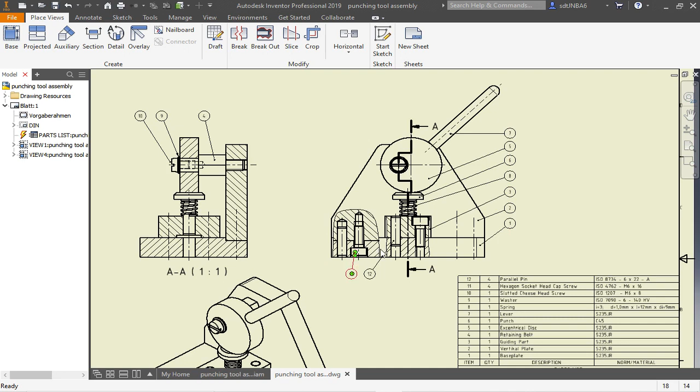Today we are going to make the drawing. So this time I want to show you how to make section views which look this way, and we're also going to talk about the breakout. So let's get started with our assembly and start

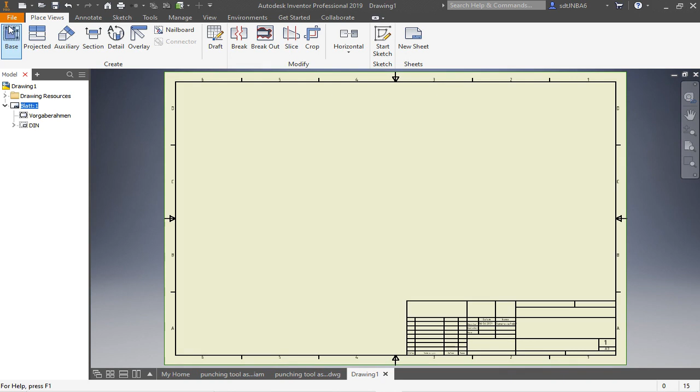DWG file. As always, we have to set with a right click the right size, A3 landscape mode, and then enter the base view. As the assembly is the only thing that's open in the background, the assembly comes automatically. Otherwise, select your assembly here on this open and existing file.

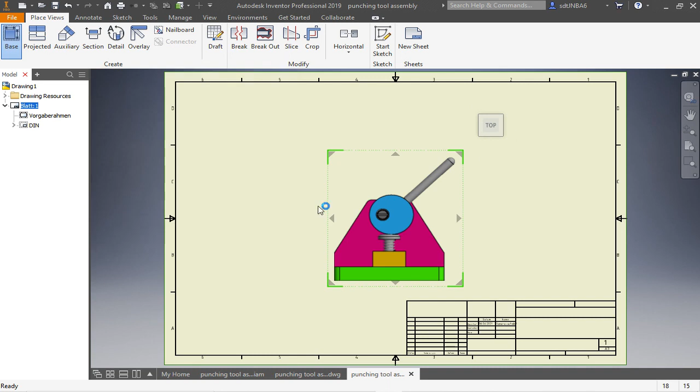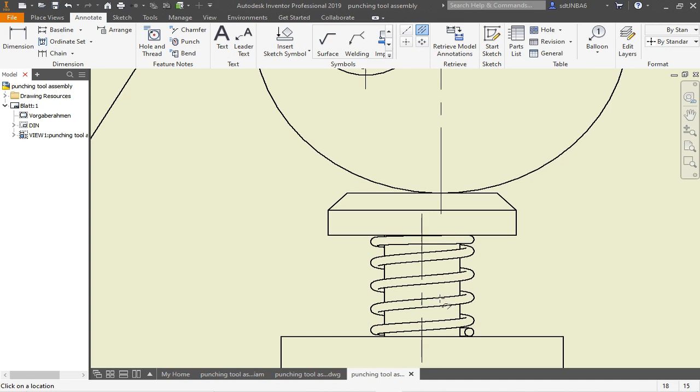So I'm going to start with a right view. This is what I need, scale 1:1. And we place it here. So let's enter at first some annotations like the center mark here and here, and a center line in our bolt. So now you can see that the eccentrical disc is not centered to the punch.

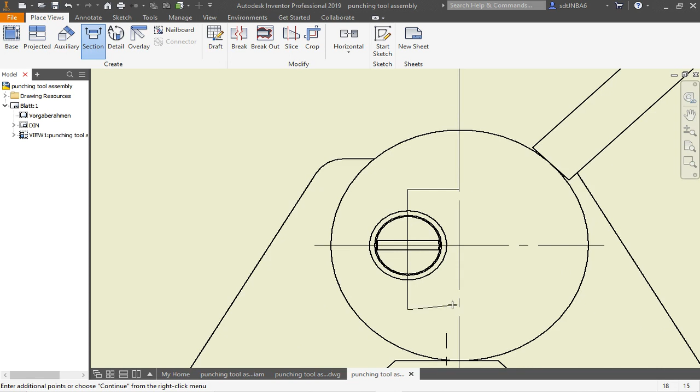Let's go on place view, go on section. Now make sure you get the middle of the disc, like so. Click once, go downwards, click a second time over the screw. Now go to the left. Now we have to find the center of the screw and the washer. Go here to the washer and the screw, pull upwards. Here, go back to the center of the disc, because here we have the contact to the punch.

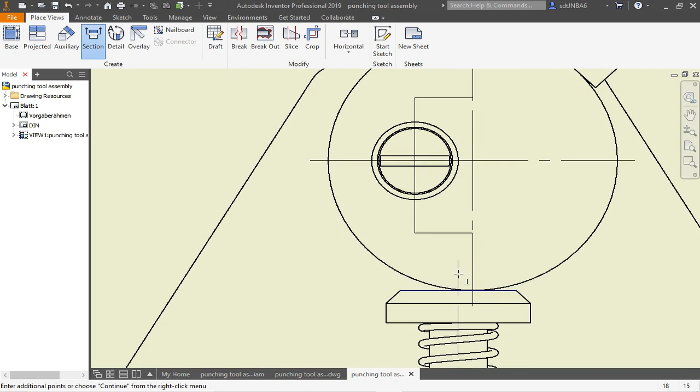Now go to the punch, place it here in the middle, go to the middle of the punch, like here, and now straight downwards. So left click, right click, continue, and bring the view to the left side.

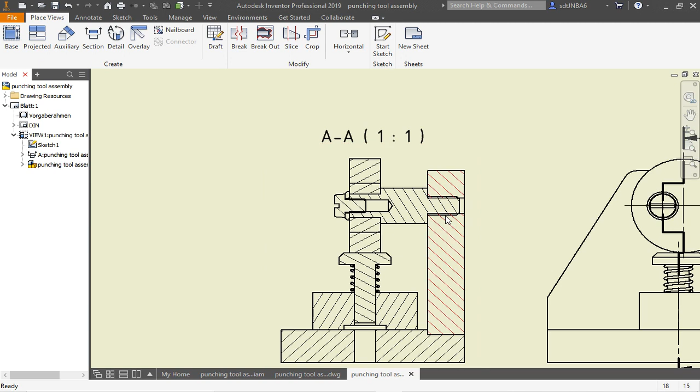So every time we have those steps here, we get solid lines, which is not correct. And so we switch off the visibility of those fat lines. We don't need them. Those ones as well. Next thing is we're going to correct the angle of the lines here. Switch it to 45 degrees and 135.

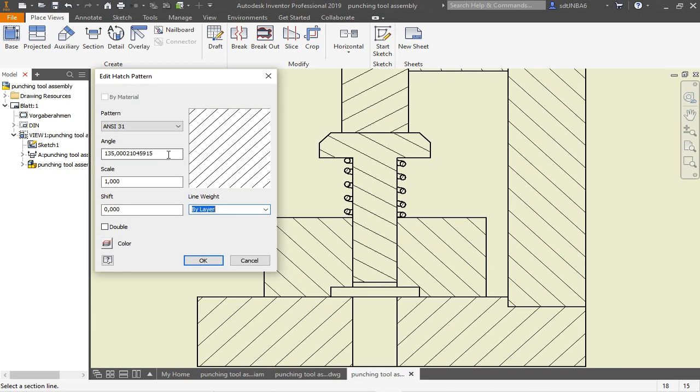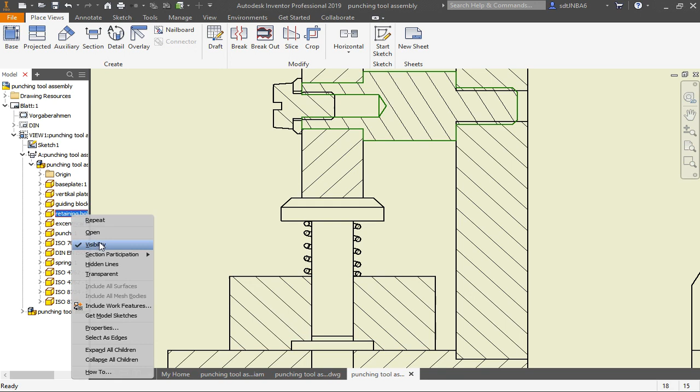And now we have to remove those parts out of the section view which are not to be displayed cut. So go here in the section view, open the punch, go right click on the punch, section participation, none. Same for the retaining bolt. Here right click, section participation, none. Same for the washer and the screw. And we also can bring the spring out of the section.

Now we can enter symmetrical lines. And we have to show the thread as well. So double click on the frame of your view, go to display option, thread feature, you have to check the box and say OK. Now you can see the thread.

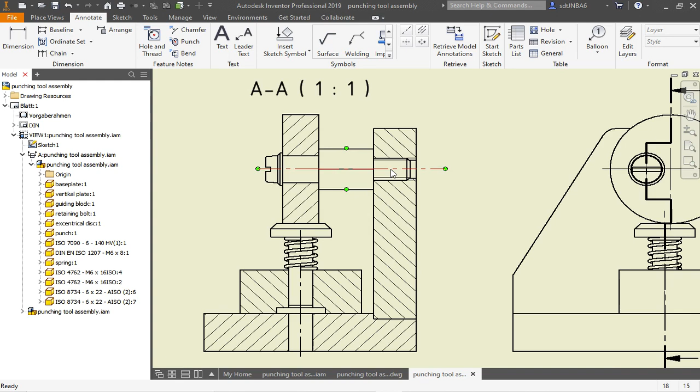So this time we want to see the hidden lines of this part. As we don't want to see them globally in all of this view, go to your retaining bolt, right click and say hidden lines. Do you want to continue? Yes, and now we only see them here in this part. And we can do the same for the screw.

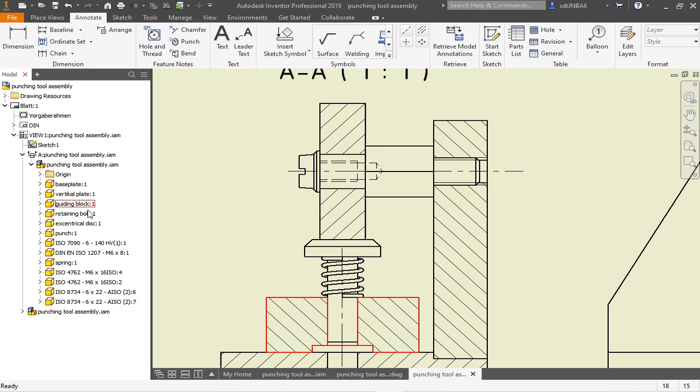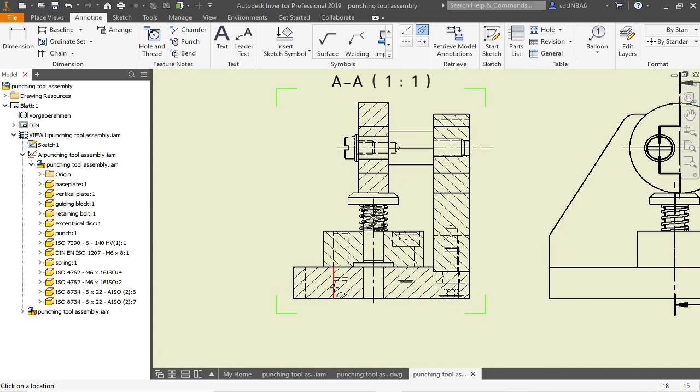So we can also enter symmetry lines to those holes here. And therefore, click on the frame, go to raster view, switch it on. Now go on the center line. You can enter them here, here, and here. Extend them a little, like so. And later on, switch off the raster lines again.

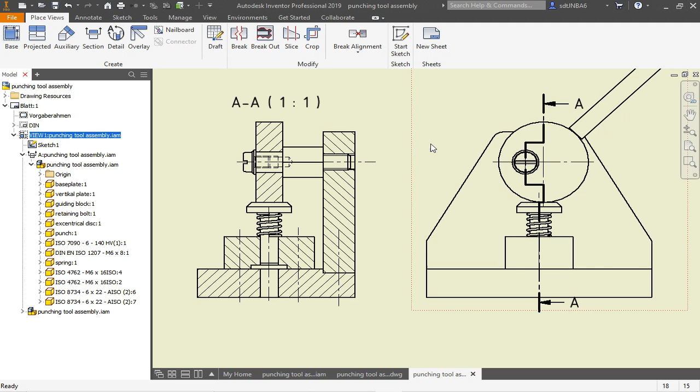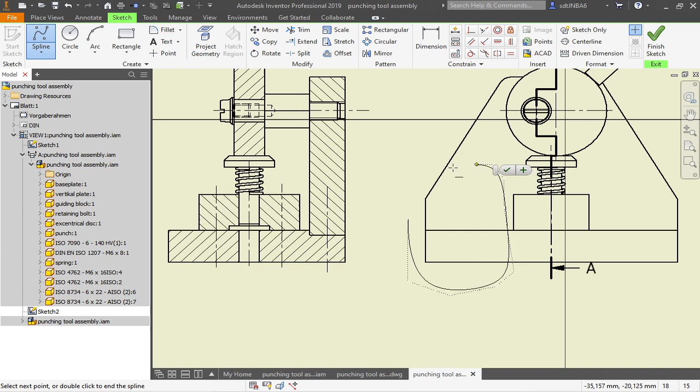So the next thing we're going to do is the breakout. Therefore, at first we've got to create a sketch. So very important is to click on the frame of your view so that the sketch will stick to this view. Go on sketch, pick up line, a spline, and now we're going to create the first spline, like so. Now it's very important that you close your sketch where you started and it gets highlighted green. You say finish,

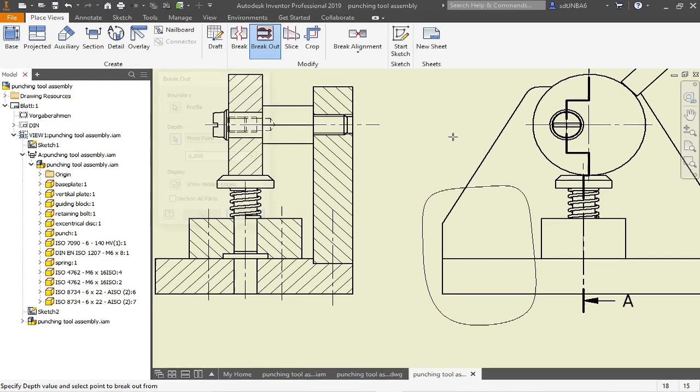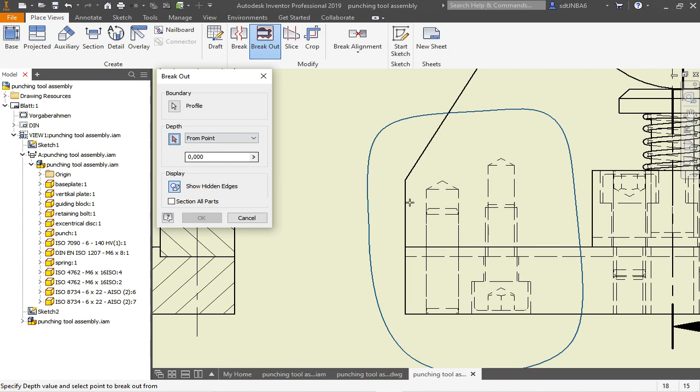go back to place views, breakout, choose your view. The profile is already selected if it's light blue. Now we need the depth. To have the depth, you go on show hidden edges. Now the edges of the screws are highlighted here where we want to have the breakout going through. So you go on depth, select the depth of a hole here and say OK. And now we have the correct depth.

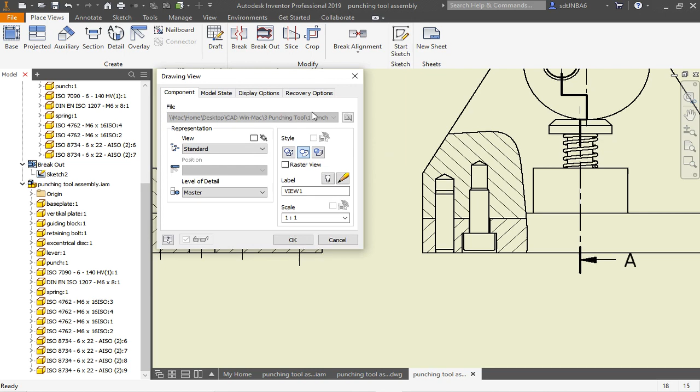All we now have to do is go to our view and unselect the screw and the parallel pin from being cut. So try here in your first view to find the screw. It is here. Right click, section participation, none. And same for the parallel pin. Right click, section participation, none. Double click on the frame, display option, thread feature selected. Go on annotate, enter symmetry lines, center lines.

So don't forget to switch those lines to thinner lines with only 0.25 millimeters. Go right click here, go on properties and by line weight go on the 0.25 millimeters line, and same for this line. Of course you can manage this at once.

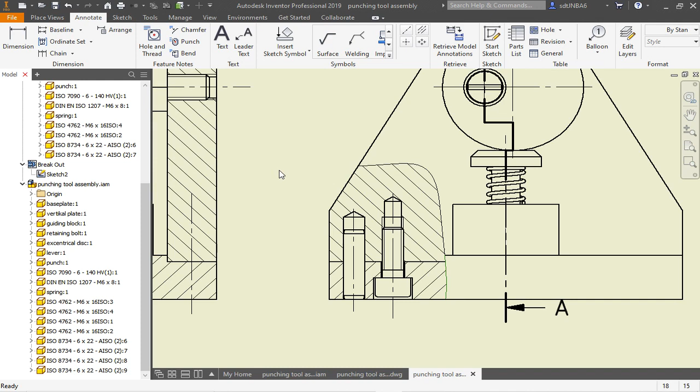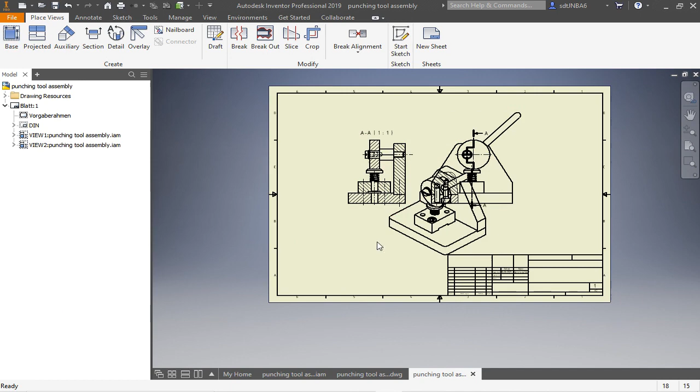Now the last thing we need is the ISO view. Go on place view, base view. Now turn around the part and now click on the corner. Scale, we have enough space for a 1:1 scale and place it below here. Now you can see you don't see the edge of the tip of the lever. And here the contour of the screw is missing as well.

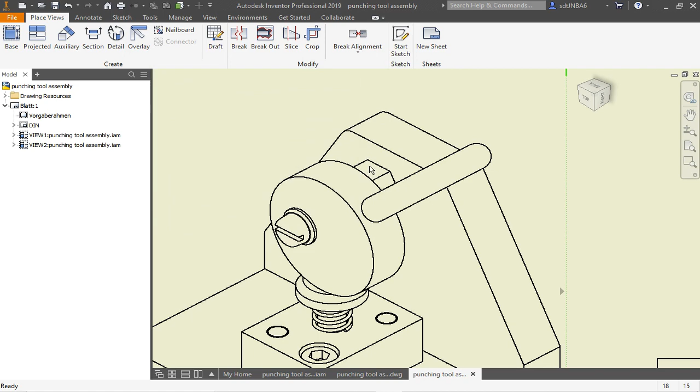So double click on the frame or in the view, display option. You need this time the tangent edges. Threads, you can click them as well, but you won't see them because they're not shown here. And now you can finish the center lines as well for yourself and the breakout. So the only thing that's missing so far is the parts list and the position numbers.